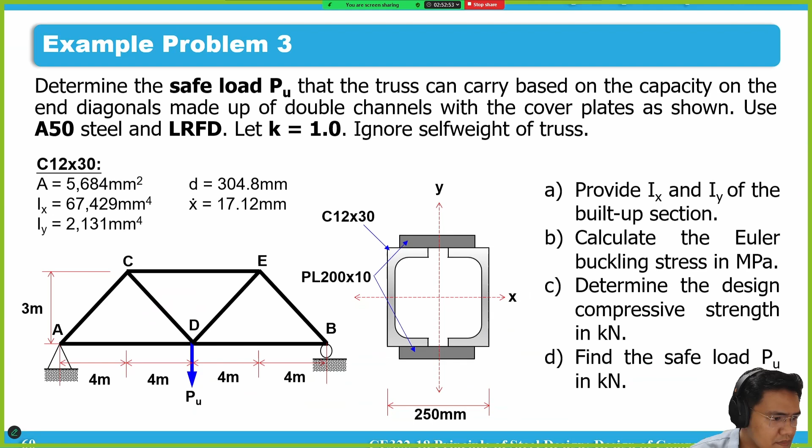Determine the safe load PU that the truss can carry based on the capacity of the end diagonals made up of double channels with cover plates as shown. Use A50 steel and LRFD. Let K equal 1.0. Ignore self-weight of truss. A. Provide I sub X and I sub Y of the built-up section. B. Calculate the Euler buckling stress in megapascal. C. Determine the design compressive strength in kN. D. Find the safe load Pu in kN.

Okay, sige. Example problem number 3 natin. By the way, anong ano to? Type of problem to? Design or investigation? Investigation po. Okay, investigation, no? Okay. Kasi given yung section na. Okay.

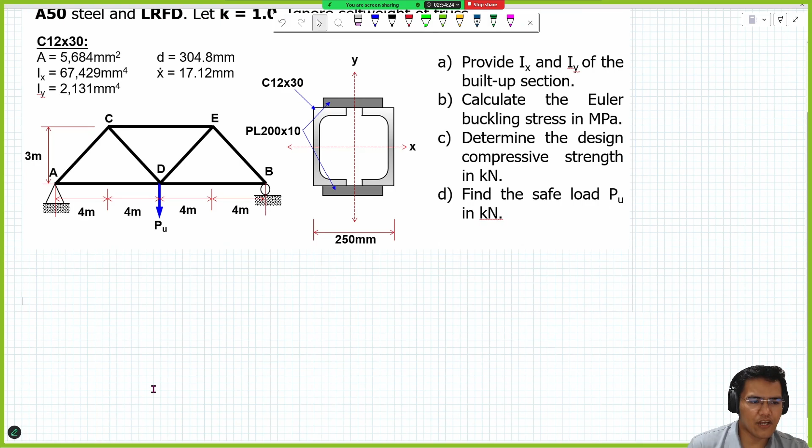Okay? Sige. So, ang problem dito, ang takeaway natin sa problem na to, magkakalculate tayo ng moment of inertia, ng section properties. Kasi, di ba, itong given na built-up section, wala namang radius of gyration na kailangan natin sa slenderness ratio. Okay? Yun nga yun yung pinaka-takeaway. And to summarize yung tinatanong dito sa problem number 3, based lang daw dun sa capacity or sa strength ng member or diagonal AC, ano daw yung maximum possible value ng load PU na pwede mong i-apply dun sa joint D. Okay? So yun, yung magdi-dictate ng load PU is yung capacity ng diagonal AC. Okay? Yun lang yung tinatanong niya.

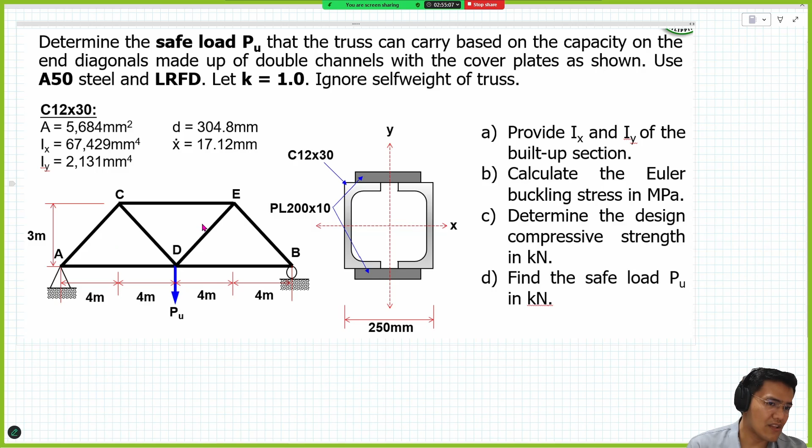Okay? Sige, solve natin to. Okay? Sige. Okay, item number 1, yung IX and IY, no? So sige, ipapastak na lang natin to. Okay? So okay na to, IX, okay, so section properties calculation tayo ulit. Okay? So kunin natin yung pinaka-figure natin. Okay, ito yung pinaka-figure natin. Okay?

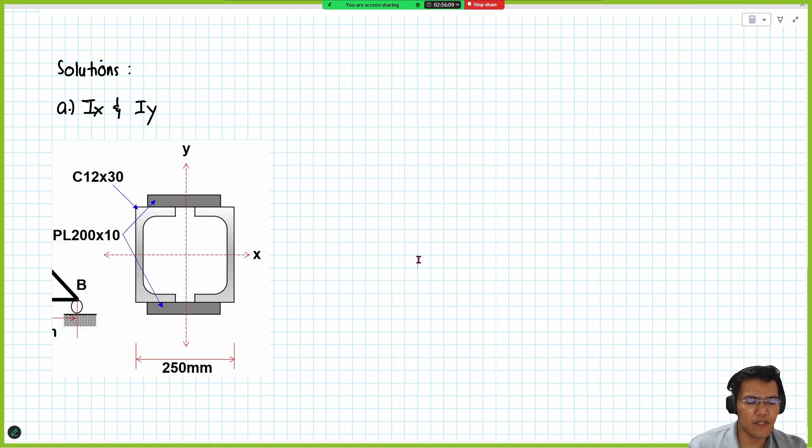Now, ito kasi yung figure natin, no? Itong figure natin, kung kukunin lang natin yung moment of inertia, obviously, kung ito yung mga reference natin, dapat kunin mo na yung centroid, 'di ba? Kasi symmetrical naman yung given section. Okay? And yun naman talaga yung kailangan natin, okay? So, by common sense, yung centroid mo, since doubly symmetrical ka, yung given section, andito sa gitna. Okay? Andyan yung pinaka-centroid mo.

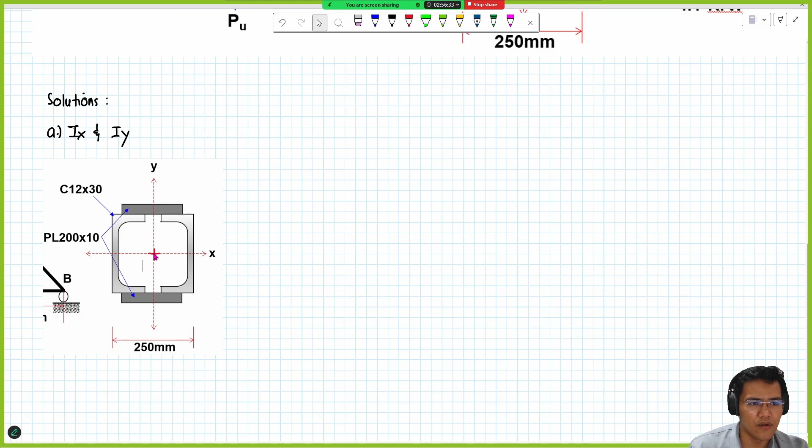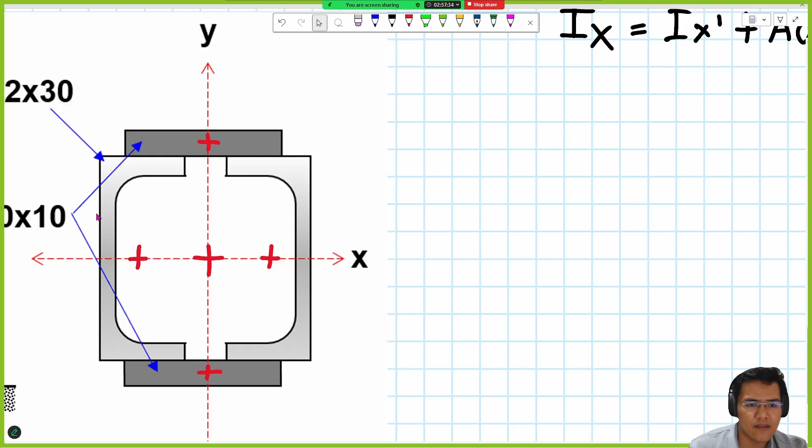Okay? Now, if we would calculate yung mga moment of inertia natin, sige, unahin muna natin si I sub x, no? I sub x kasi, 'di ba, using transfer formula, okay, I sub x is equal to Ix prime plus area d squared, no? D squared. Now, yung moment of inertia, no, that is depende sa section or sa shape na kino-consider mo. Kung i-check natin yung mga centroid muna, sige, ng mga individual shape. Kapag channel alone, halimbawa itong channel na to, alam natin yung centroid niyan somehow andito eh, no? Andito eh. Kung yung channel na to, yung i-consider natin, yung centroid niyan somehow andito. Okay? Similarly dito sa channel na to, andito rin yung centroid niya. Itong top plate, andito yung centroid niyan. Ito naman andito. Okay? Now, if we would calculate muna, sige sabihin natin mag-focus muna tayo dun sa channel, okay?

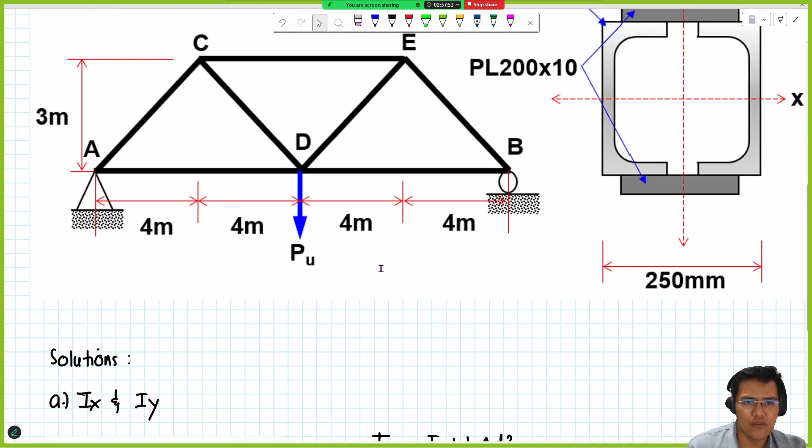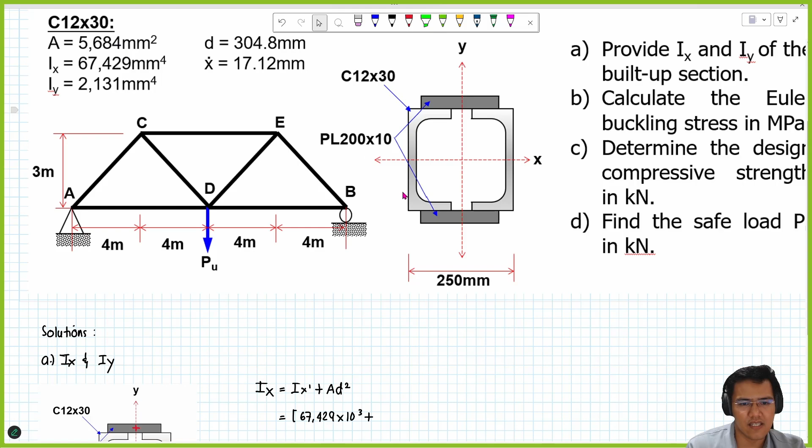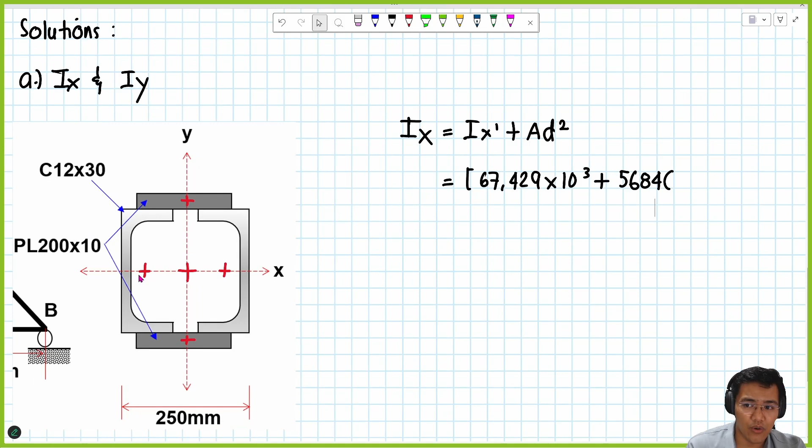And kunin natin yung moment of inertia niya with respect to x-axis as depicted dito sa figure. Basically, kukunin mo lang yung section properties ng channel which is itong C12 by 30, no, na ginamit. And that is 67,429, times 10 to the third, no? Okay? Plus, no, yung area ng ating channel. Okay? So yung area ng isang channel natin as presented, 5,684. Okay? Now, in terms of the distance D, no? Ano ba yung definition ng distance D? Well, basically, ang definition niyan is from the reference axis, no? Ano daw yung distance nung channel mo. Okay? Yung distance na ganito. Okay? So lumalabas na since nag-coincide yung centroid ng mga shape na yan dun sa reference axis mo, yung distance mo is 0. Okay? 0. Common sense yun, di ba? So, for the sake of demonstration, ilagay na lang natin dito. Although itong term na to, maka-cancel out. Di ba? Now, since yung channel mo kasi dalawa yon, okay? Kahit saan naman yung i-consider mo dyan, okay lang. No? So, ito times 2 na lang natin to. Okay? Times 2 na lang natin since parehas lang naman yung channel mo.

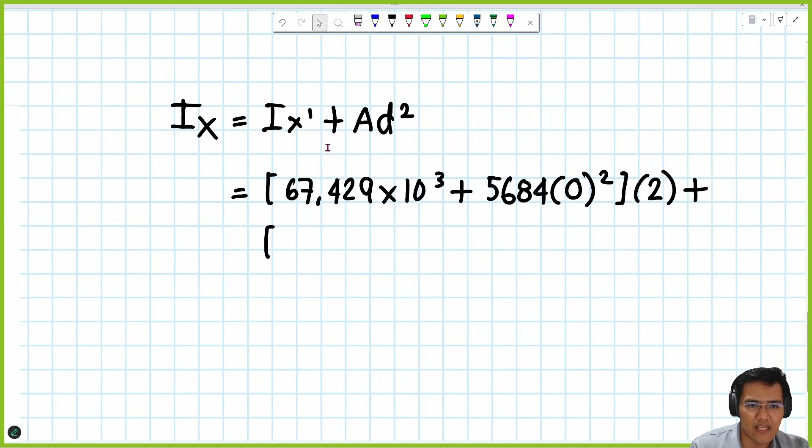Okay? Now, okay na tayo sa channel. We now need to proceed dun sa dalawang plate. Yung dalawang plate naman, ganun pa din, no? Parang parehas lang sila. Pwede rin natin ulit i-times 2. Okay? So, open and close parentheses. Okay? Kunin muna natin yung ix prime nung plate natin. Again, yung plate natin is 200 by 10. Okay? 200 by 10.

So, for a rectangular section, the moment of inertia Ix prime is BD cube over 12. Yung base natin dyan is 200, yung depth natin is 10. Okay, BD cube over 12, so 200 times 10 raised to 3 divided by 12. Plus, continuation ng formula, area ng isang plate, it is 200 times 10.

Times yung distance D. Okay, calculate natin yung distance D. Ang definition ng distance D dito sa transfer formula is from the reference axis to the centroid of your shape in consideration, which is dito, as you could see here, that is from this point to this point.

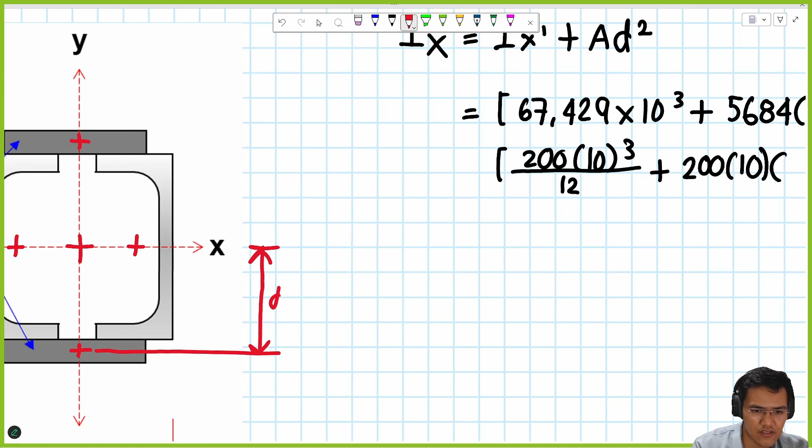Okay, ito yung distance D natin. So, for the sake of this discussion, sabihin natin distance 1. Actually, yung distance 1, we could calculate to. So, paano natin makakalculate yung distance 1? Paano natin makakuha itong distance 1?

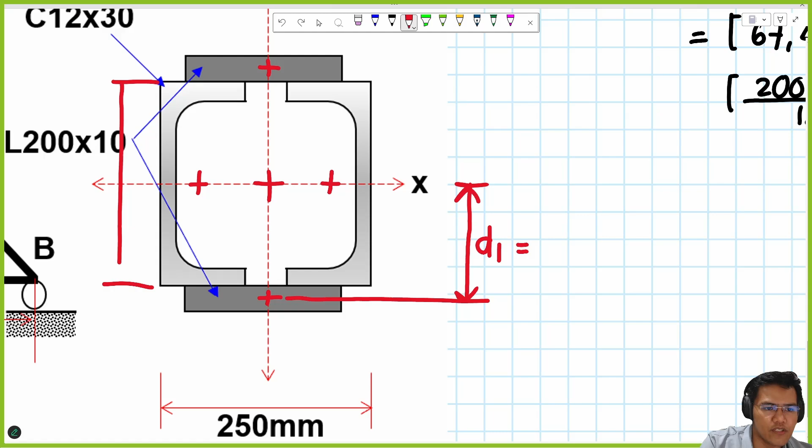Well, basically, kung itong length na to is as simple as the depth ng channel mo, okay, that is the distance depth ng channel mo. At binigay siya sa section properties, ito, 304.8. So, kalahati nung D would represent yung distance na yon.

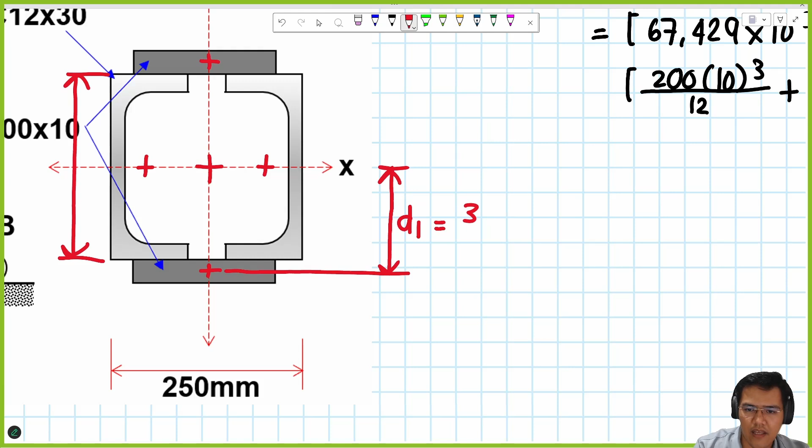Tapos, pagdating dito sa plate, yung thickness natin is 10. Kalahati din nung thickness, so that would be, D sub 1 is kalahati nung depth ng ating channel, 304.8, divided by 2, plus kalahati ng thickness ng ating plate.

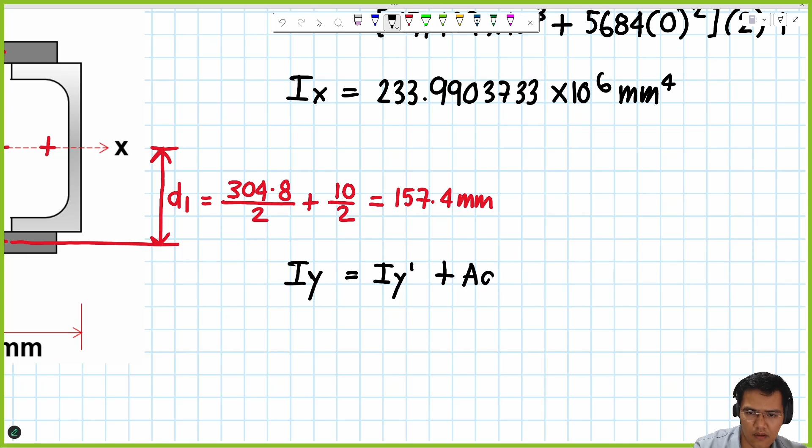Yung kasunod natin is yung at y-axis naman. Similar set of equations, transfer formula, plus area d squared. Now, ganun pa din, dito tayo mag-refer kay y-axis, yung reference axis natin. Now, obviously, pagdating sa y-axis, yung centroid na nagko-coincide with the reference axis is yung centroid ng dalawang plates.

So, might as well, unahin natin yung dalawang plates. Now, sa dalawang plates, ganun pa din, it's a rectangular section, so BD cube over 12 is applicable. But this time, we need to swap yung value ng base and depth natin. So, ito yung magiging base natin, yung 10, yung height natin is 200.

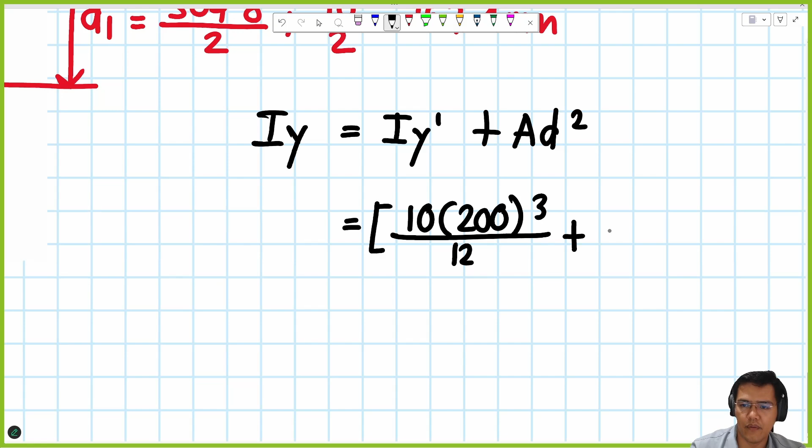Cube, over 12, plus yung area, which is 200 times 10, times yung distance D, which is alam naman nating 0 kasi nag-coincide nga yung centroid nila with the reference axis, multiplied by 2 kasi dalawa yung ating given plate. Now, we could now proceed dun sa ating dalawang channel.

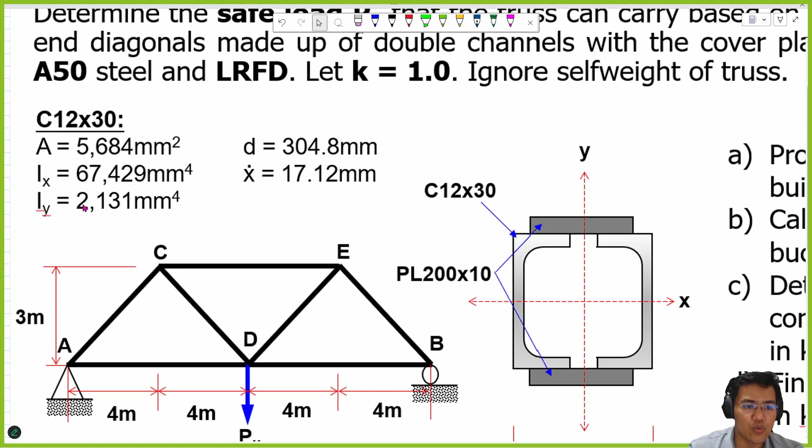Now, sa channel, ganun pa din. Yung IY prime niya is yung sa given section na 2,131 times 10 to the third.

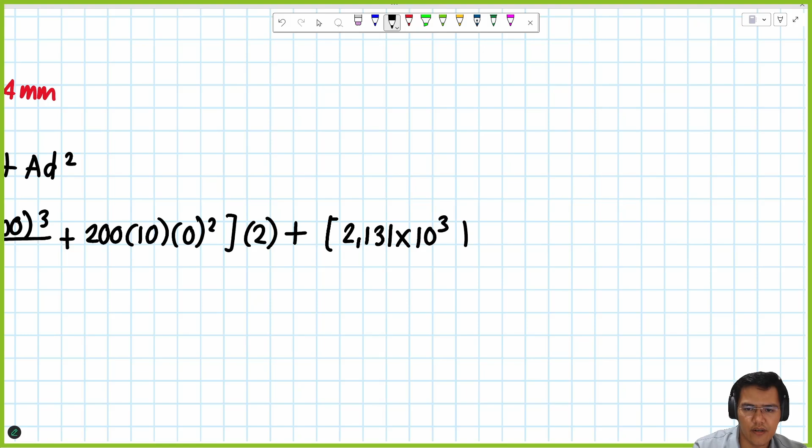Area nung isang channel as listed, 5684. Multiplied by distance, distance D. If you would refer dun sa pinaka figure natin...

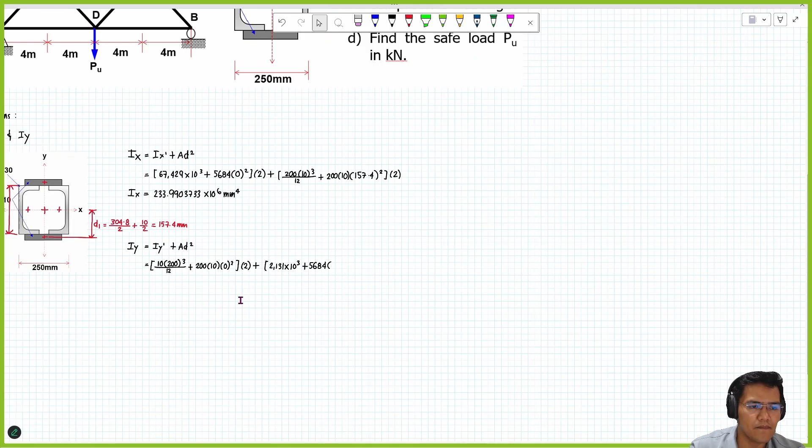Yung definition again ng distance, D is simply from the reference axis to the centroid of your given shape. So ito yung distance na yon, yung ating distance D. So sabihin natin D, ano yan? D2, D sub 2.

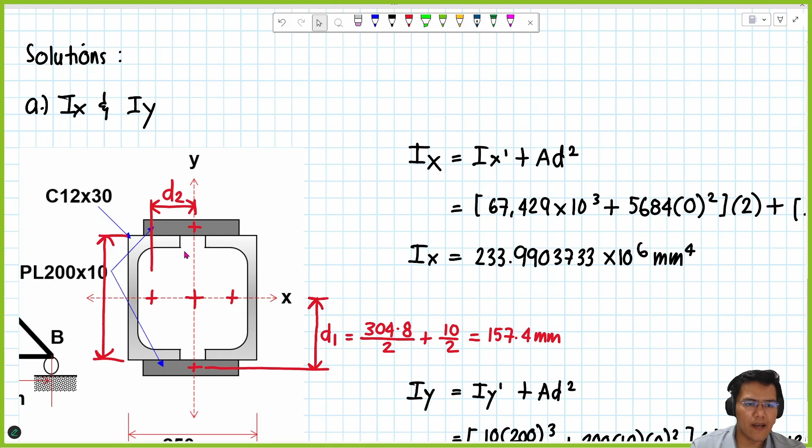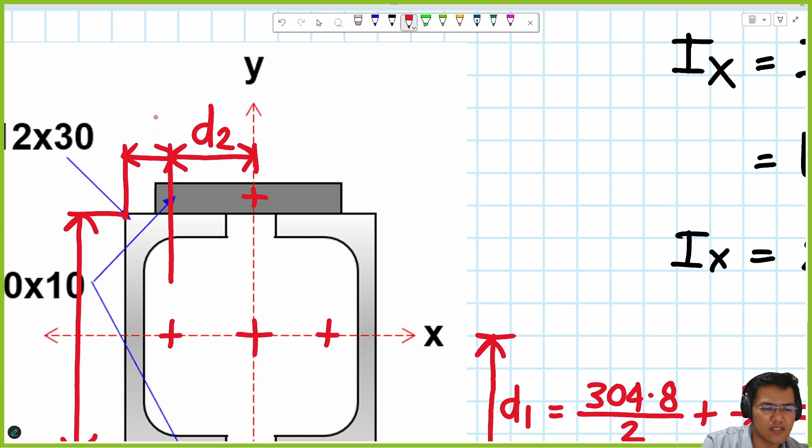Okay, so ngayon, paano natin i-calculate tong D sub 2? Well, if magre-refer ka dun sa isang channel, yung definition kasi ng x bar na equal to 17.12 sa isang channel, ito yon, yung distance from the back surface nung web mo sa channel to the centroid. Yan yung tinatawag nating x bar, itong distance na to, this is distance x bar.

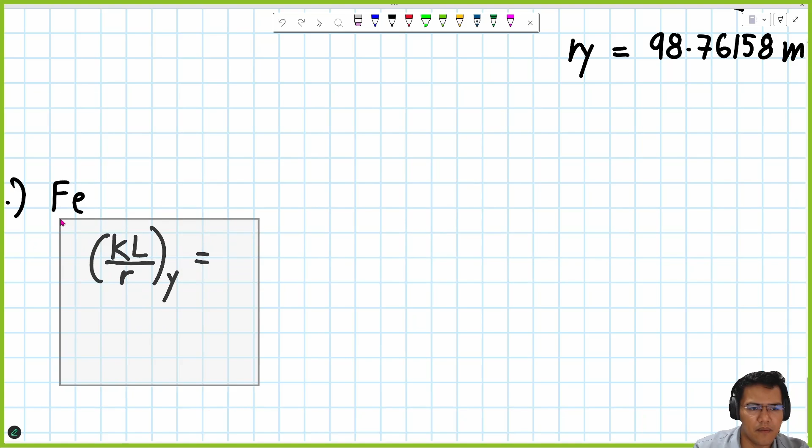Okay, let's itemize this. So for the problem, our K is 1.0. The length of diagonal AC, as you can see, is a 3-4-5 triangle again, so that is 5 meters.

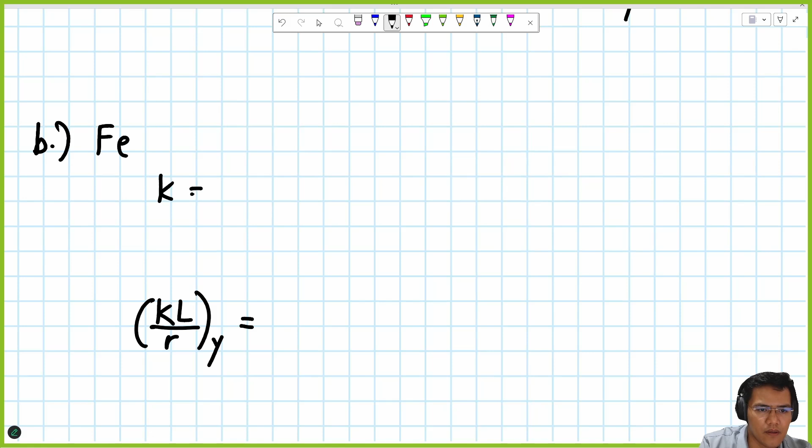So let's list it out. K is equal to 1.0. Length of diagonal member AC is equal to 5 meters or 5,000 millimeters. Now plugging this into our equation for slenderness ratio, we can now calculate, and that is 1.0

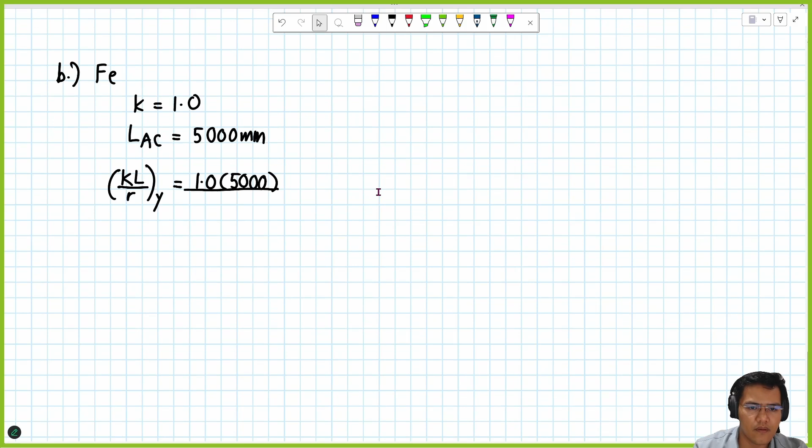Okay, so we're getting close. Times 5,000 divided by the radius of gyration. Okay, so now we have the slenderness ratio.

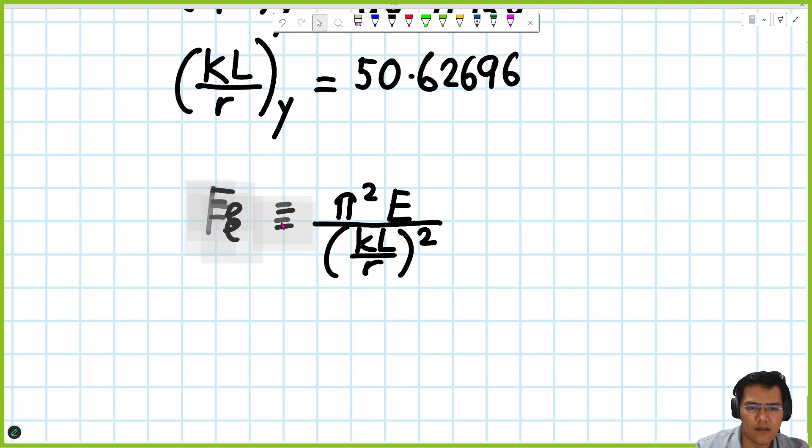200,000 divided by the governing slenderness ratio, squared. And all in all, we would have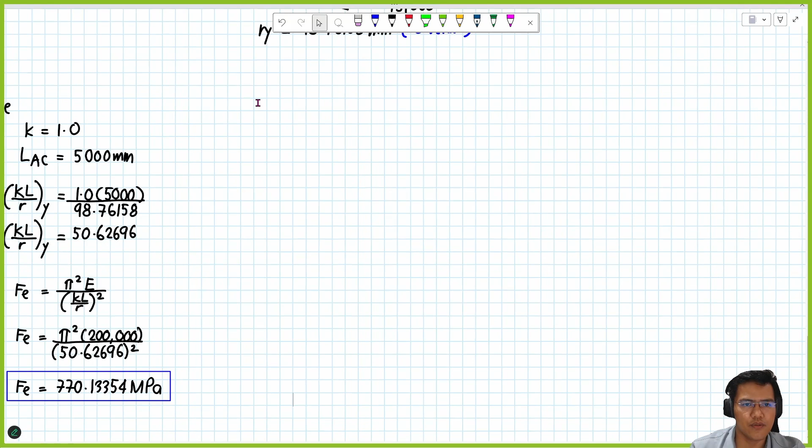The question is, is it elastic or inelastic? So let's define the thresholds. 0.44 Fy. Our Fy, if I'm not mistaken, is A50.

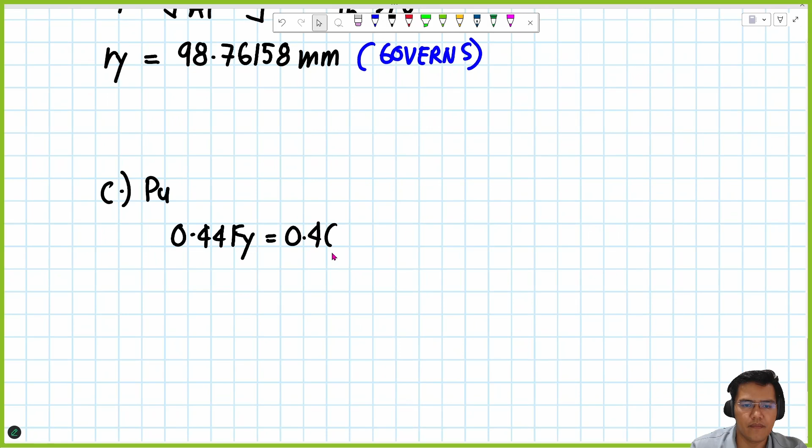Yes, A50 still. So that is 345. So this is, if I'm not mistaken, 151.8. Is that correct? Yes, sir. Yes po.

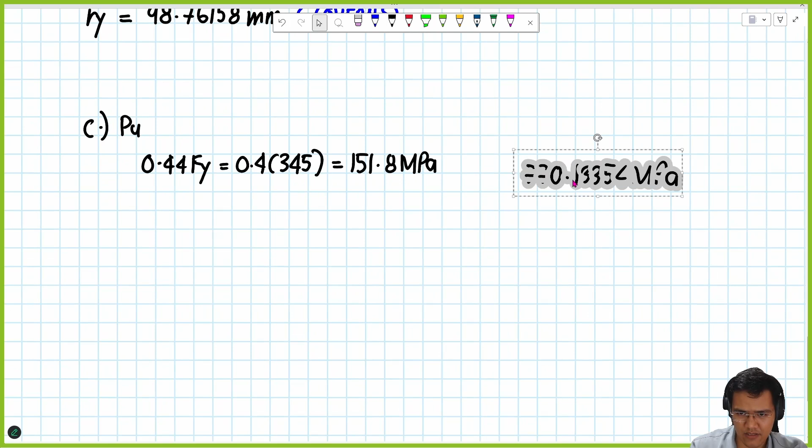Comparing with F sub E, so we know if it's elastic or inelastic. Again, this is less than - common sense, you're familiar with this already - so that means this is inelastic. This is inelastic buckling.

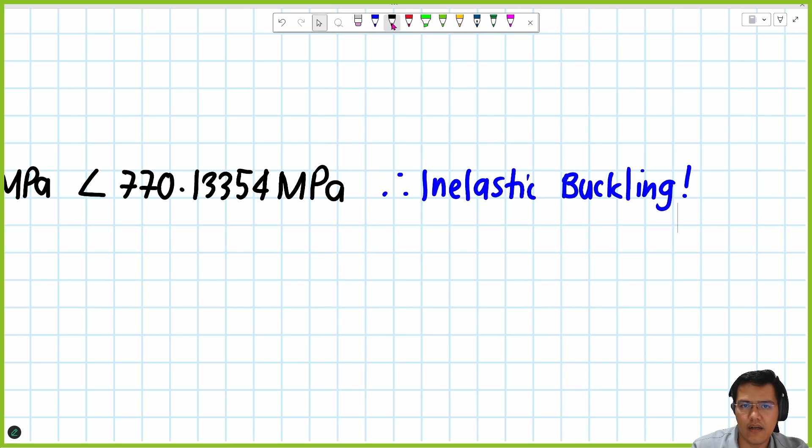So, inelastic buckling. So the formula for inelastic buckling for F sub CR is as simple as F sub CR is equal to 0.658 to the power of Fy over F sub E, times Fy. So let's plug in the given values.

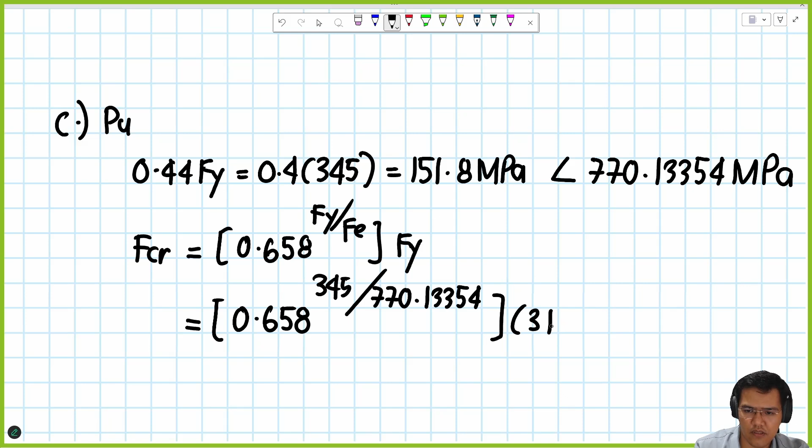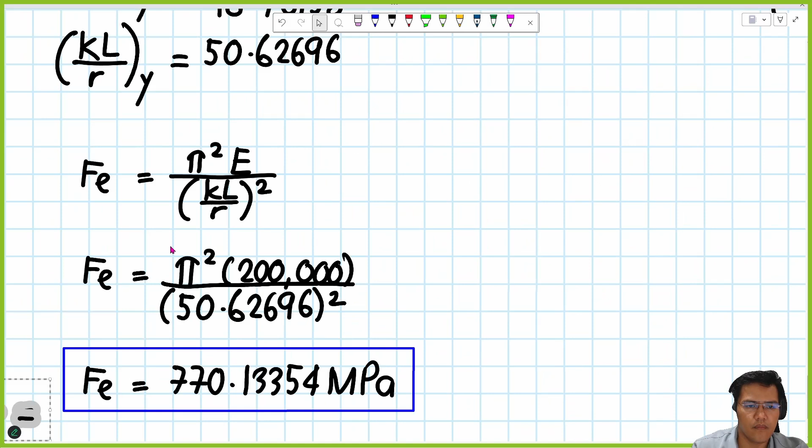0.658, 345, divided by F sub E, times Fy. So we would have F sub CR, which is equal to - how much is this? - 286.01510. Okay, so now we have F sub CR.

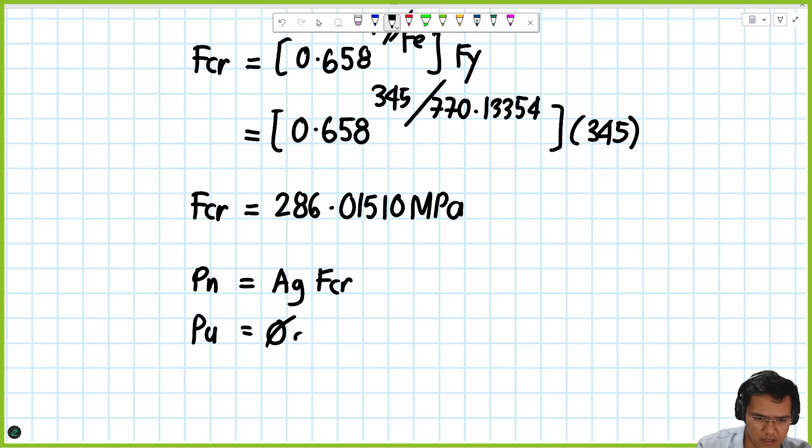Let me plug in the equation here, guys, let me direct it. P sub N is AG times F sub CR. But P sub U is equal to phi sub C, P sub N. Now let me plug in P sub N into my equation for P sub U. Phi sub C, P sub N is AG F sub CR. So I would have P sub U is equal to 0.9 for LRFD

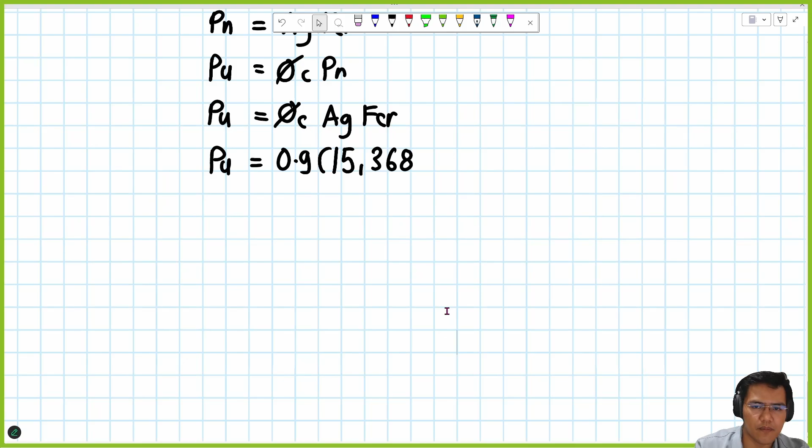times the gross area, which is the total area of my built-up section, and that is 15,368. Multiplied by F sub CR, which we just calculated. And then don't forget to divide by 1,000. So now we have P sub U.

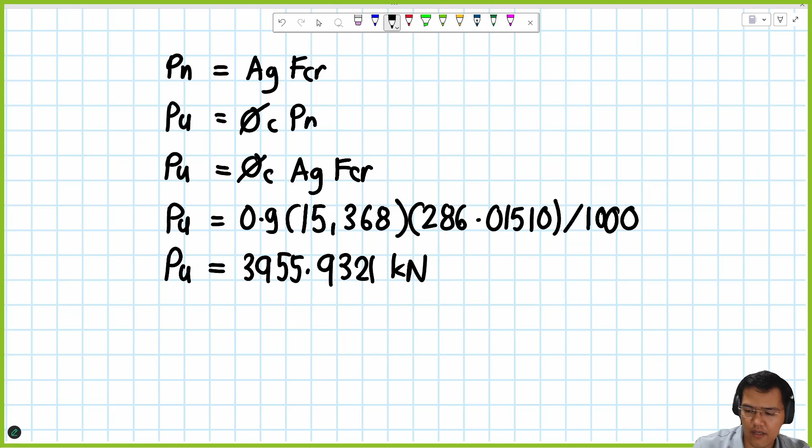The design compressive strength of the given section. How much is this? 3,955.9321 kilonewton. So this is our answer for item C.

Now let's proceed to the last item, which asks, what is the safe load PU? Since we already got the capacity of member AC, diagonal member AC, item D asks what safe load PU can be applied based on the capacity of AC. Okay, so if we refer to our figure here

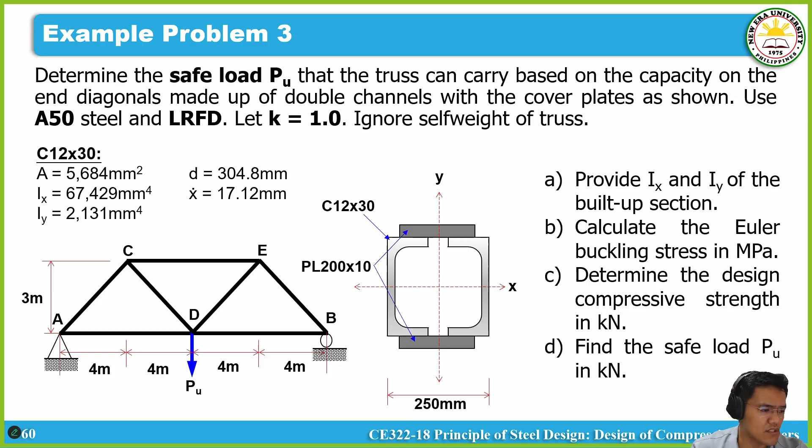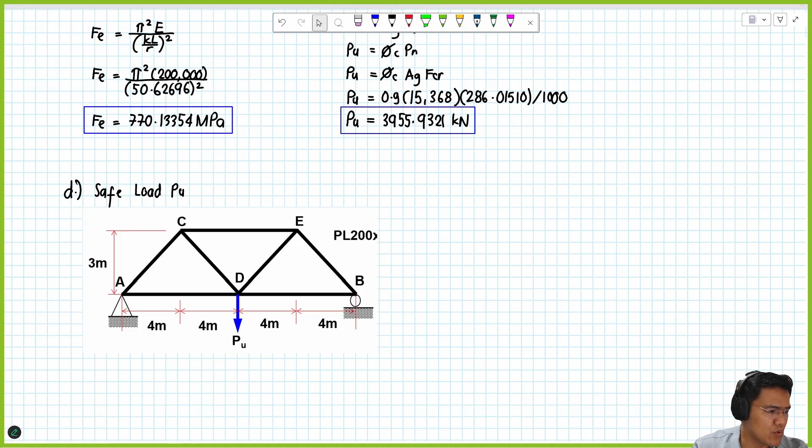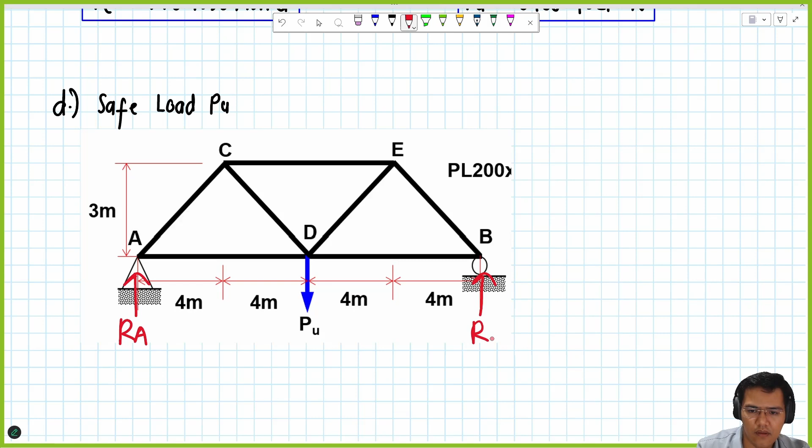Sa pinaka-figure natin, kung i-check natin yung figure natin, by common sense, since symmetrical yung application ng ating load, and symmetrical din naman yung system natin, di ba? We could conclude na by symmetry, kung gusto nating kunin yung reaction, sabihin natin R sub A, as on this one is R sub B. By common sense, magsi-share lang sila ng equally ng load, which is divide 2 lang, kumbaga.

Okay, so we could say na yung reaction at A is as simple as yung load PU divide 2, or as simple as 0.5 PU. So from this one, meron na tayong equation 1.

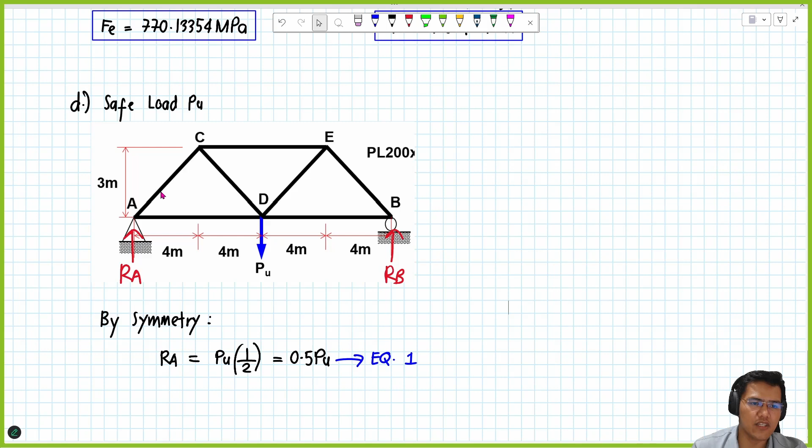Kailangan pa natin ng isang equation to define yung mga unknowns natin. Pero ang pinakamagandang gawin natin, kasi truss system lang naman to, yung AC yung kukunan ulit natin, so might as well use method of joints. By using method of joints, may makukuha tayong mga unknowns.

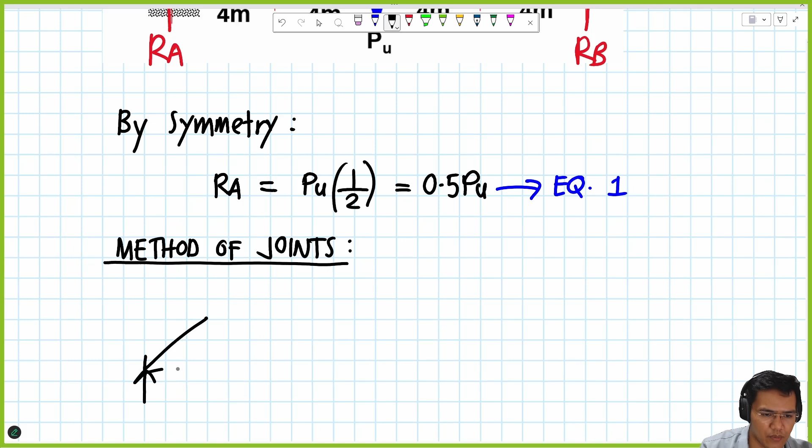By using method of joints, dun sa ating left support, we would have this free body diagram. Reaction upward, meron tayong diagonal AC, which is obviously compression. Sabihin natin na this one is yung ating reaction, ito yung ating force AC. Ito naman, di natin kailangan, so iwanan natin yan. Yung slope natin as presented dun sa problem is 3 rise, 4 run, so we have 3, 4, 5 triangle ulit.

Gamit summation of forces vertical is equal to 0, upward positive. Yung reaction is positive kasi going upward minus F sub AC na downward multiplied by a certain ratio, since vertical component, that would be 3 over 5, is equal to 0. So ito yung equation natin. Medyo maging specific lang tayo, sabihin natin R sub A to, so yung reaction dito is yung R sub A. So meron tayong equation 2, equation 1 and equation 2.

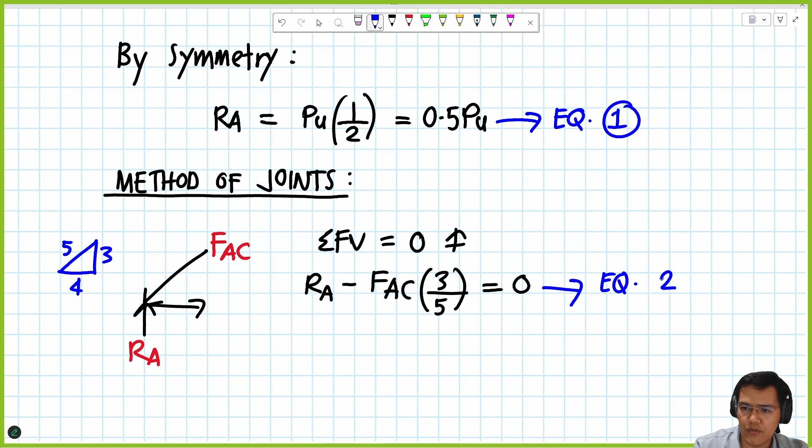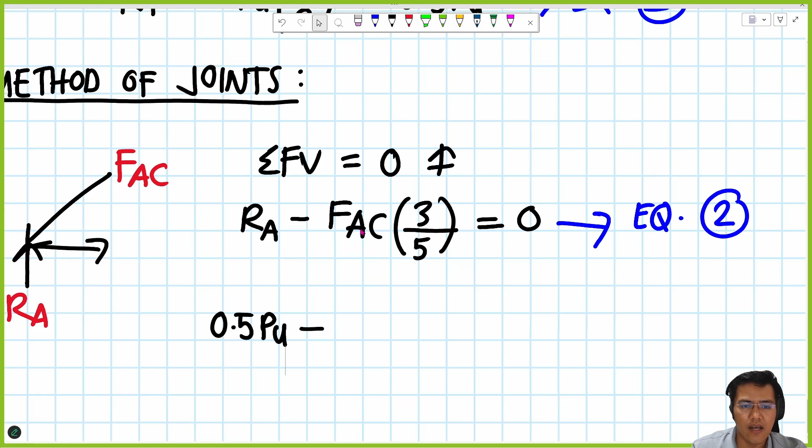Kung meron na tayong dalawang equation, we could plug in itong equation 1 dito kay equation 2, kasi sabi natin R sub A is 0.5 PU. Substitute natin dito yung R sub A, so we would have 0.5 yung R sub A PU minus yung F sub AC, hindi pwedeng maging unknown to. Basically yung F sub AC siya yung internal force acting doon sa diagonal AC.

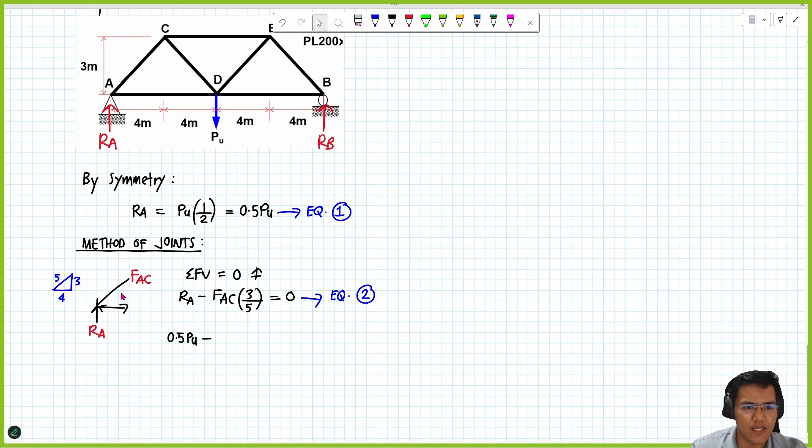Pero obviously, and common sense, si F sub AC, pwede natin siyang equate doon sa design strength na nakalculate natin doon sa section na to, kasi hanggang doon lang yung limit nung end diagonal natin, which is the internal force. So pwede natin siya palang i-equate, ito lang kasi yung pinaka-limit nung end diagonal natin in terms of loadings.

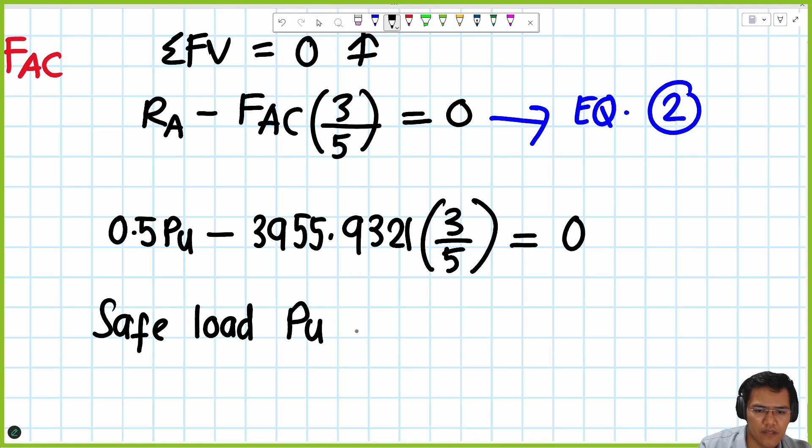Kung ito yung equivalent nung F sub AC at we would go back dito sa ating equation, ibig sabihin we could simplify na ang unknowns natin is yung load, safe load PU. Paki-simplify nga ito, ano yung value ng safe load PU? 4747.12, sir. Okay, safe load PU now is equal to 4747.12 kilonewton. Okay, so ganun lang, parang binalik lang natin.

Ito na yun, basically, para mas mataas pala siya, yung load PU kumpara doon sa capacity ng ating end diagonal. Pero ganun talaga, ayun, ganun lang siya, ganun lang siya isa-solve, gagawa ka lang ng mga series of equations.

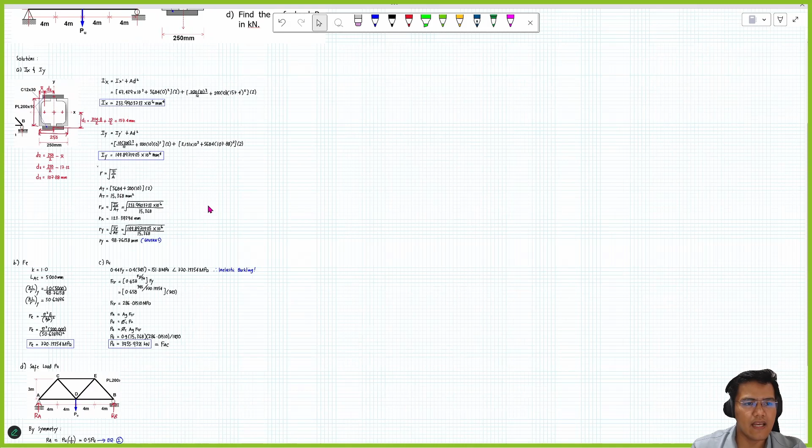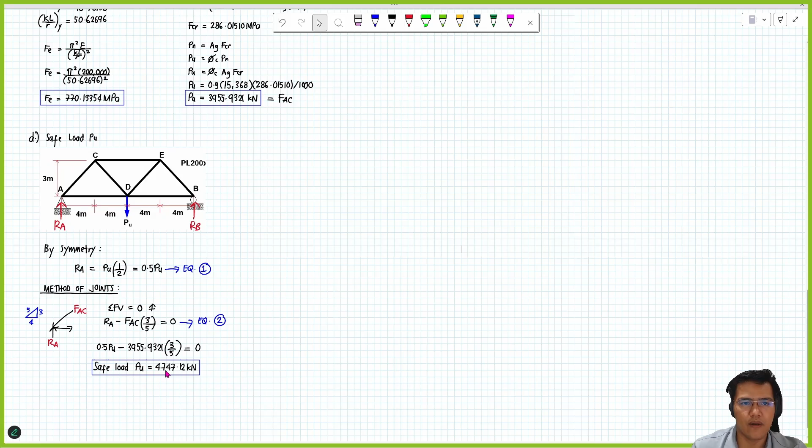So to summarize, sa problem number 3, ang pinaka-take away natin dito is yung mga cases na kung saan hindi given yung section properties or built-up section tayo, so we need to calculate. Ito nga yung example ng calculation for this one, tapos maka-calculate natin yung slenderness ratio, i-define natin kung anong type of buckling tayo. At yun nga, i-equate lang naman natin yung design strength and available strength, yung required strength and available strength. Gamit tayo ng mga equation, meron tayong mga values na makakuha.

Okay, yun yung takeaway para dito sa problem number 3. Any clarification or questions for problem number 3? Okay, sige, very good, so that would end yung chapter 4 natin, which is design of compression members.